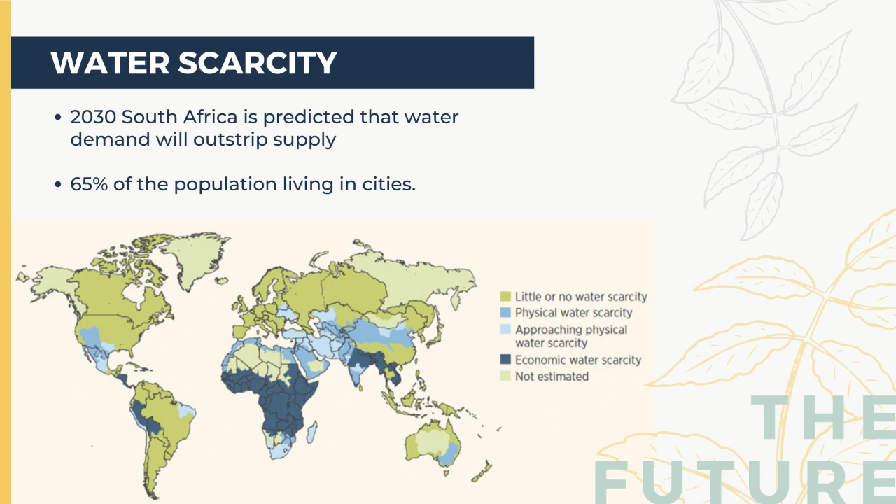As water is a finite element, how do we create this illusion of infinite water the way nature has done for billions of years? While water is the most common element on our planet, less than 3% is fresh water that can sustain human life. As the global demand for water keeps pushing on this limited resource, we need to become more innovative with water usage.

Water is the promise of life and can be linked to all the UN Sustainable Goals, some directly and others indirectly as virtual water. It can even be linked to quality of education, as young girls are able to attend school instead of harvesting water for their communities. At a global level, South Africa's municipal water usage is almost 3 times the global average, and this means we have capacity to improve our water efficiency.

A new emerging engineering division is ecological engineering. While this division is globally recognized as an independent sector, in South Africa it falls within the civil engineering industry. Ecological engineering focuses on systems thinking and creating regenerative design solutions. So how do we go beyond sustainable into the realm of regenerative design by adopting net positive water, mimicking the natural water balance?

In South Africa, it is predicted that water demand will outstrip supply by 2030, with 65% of our population living in cities. But people are saying that we've already allocated all our water resources way back in 2002. So why is nobody talking about this? Because they've been technically gagged from releasing the information. Living in a country crippled by load shedding, what will our future look like when we must ration water as well?

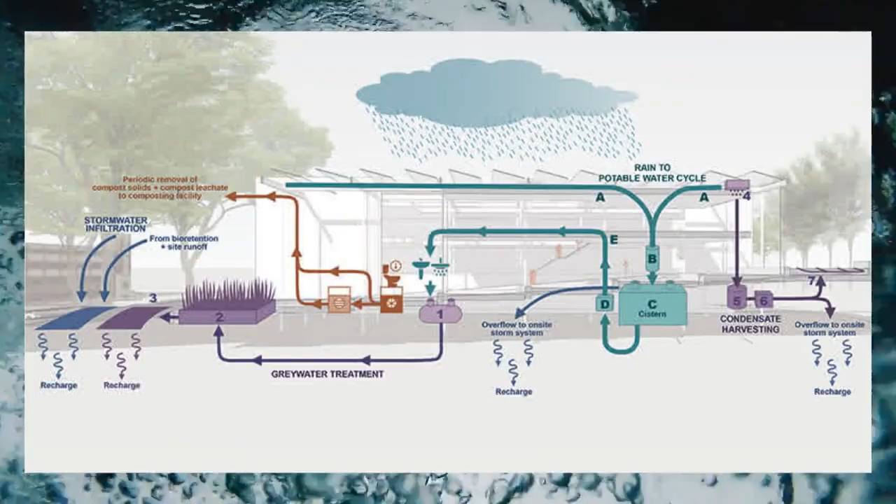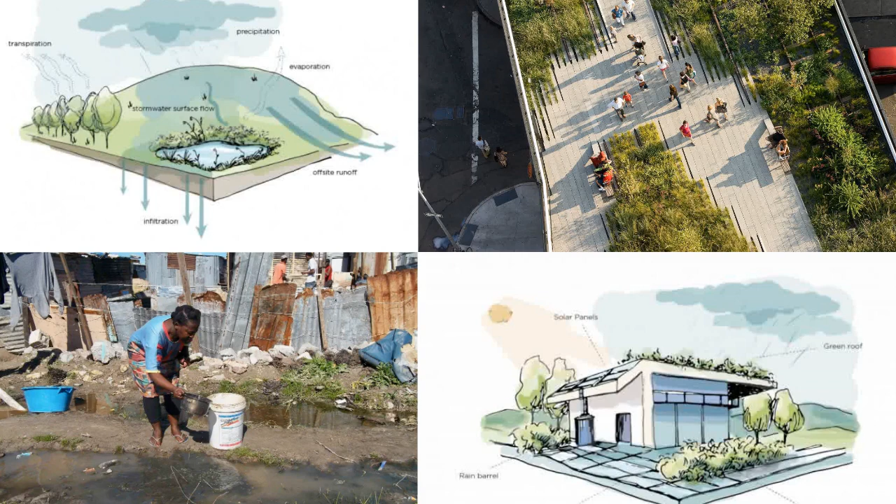So in summary, a net positive water strategy delivers an off-grid, ecologically balanced design that mimics a natural system while addressing water harvesting, wastewater treatment, and stormwater management without disrupting the natural water cycle of the site.

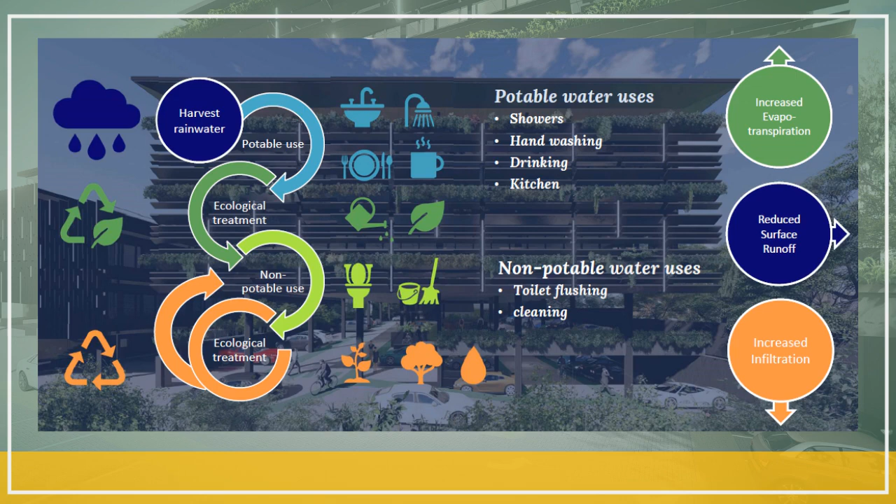How is Living Building net positive water different from other certification processes? The most fundamental difference is that all water demand must be met within the carrying capacity of the site. What that really means is that we need to mimic the natural hydrological conditions without the use of harmful chemicals. All grey water and black water must be retained and managed on site.

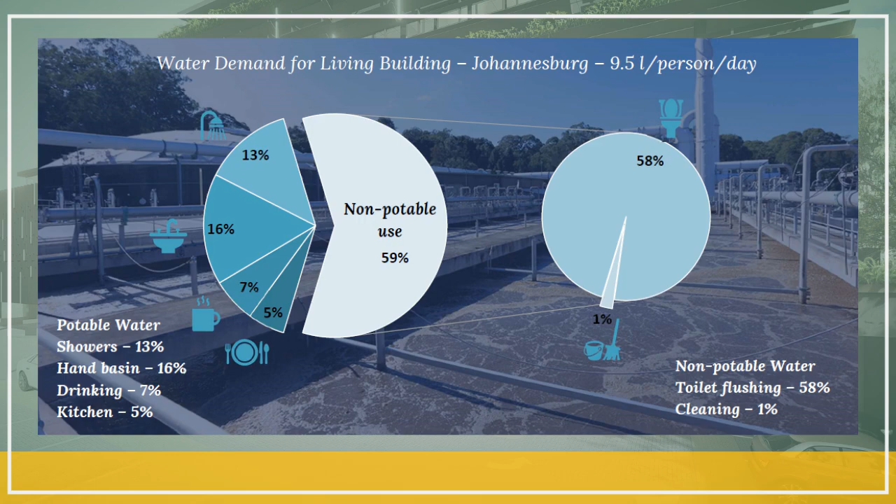With that long list of very specific requirements, it is very clear why so few buildings have met the certification process. In my opinion, it is probably the highest water certification process in the world, and if we do all of the above correctly, we can ensure clean water resources for future generations.

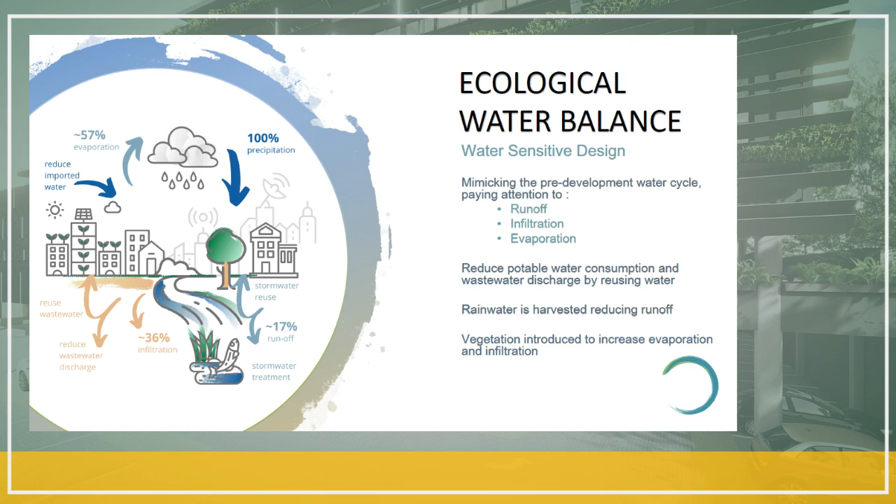So how do we create an ecological water balance? We have to first aim for the targets that have been set by the pre-development conditions, paying attention to runoff, infiltration, and evaporation. Only by rationalizing the water demand as fit for purpose can we create the optimal water balance for a project.

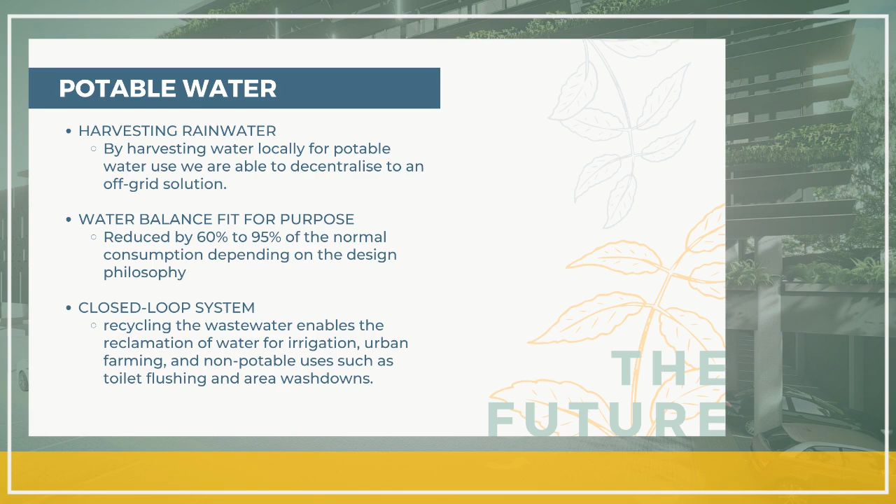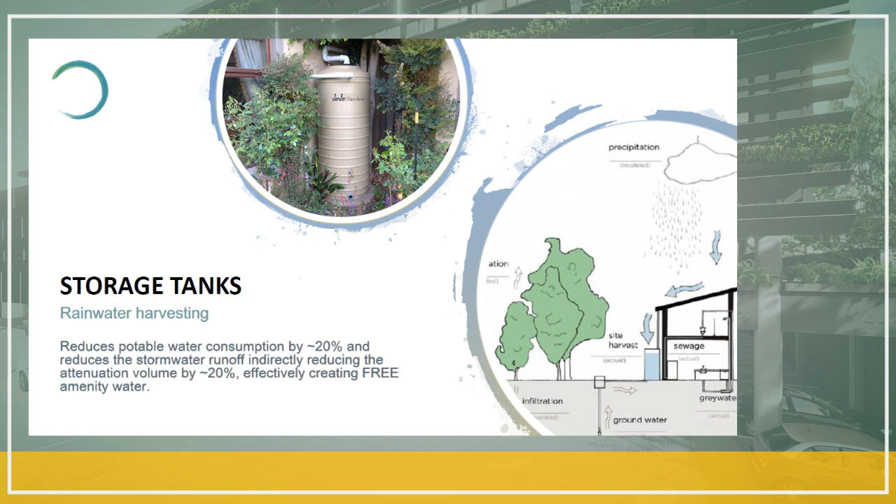Rainwater is one of our purest forms of potable water, requiring the least amount of effort to purify, and is not allowed to be used for toilet flushing in the Living Building Challenge. It should be used exclusively for potable water. It is by harvesting water locally for potable water use that we are able to decentralize to an off-grid solution, which is really the solution that economic water-scarce Africa really needs.

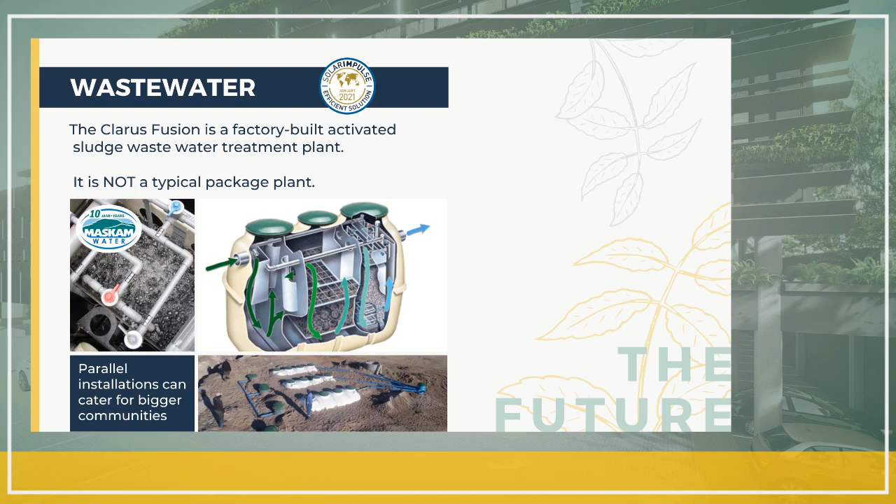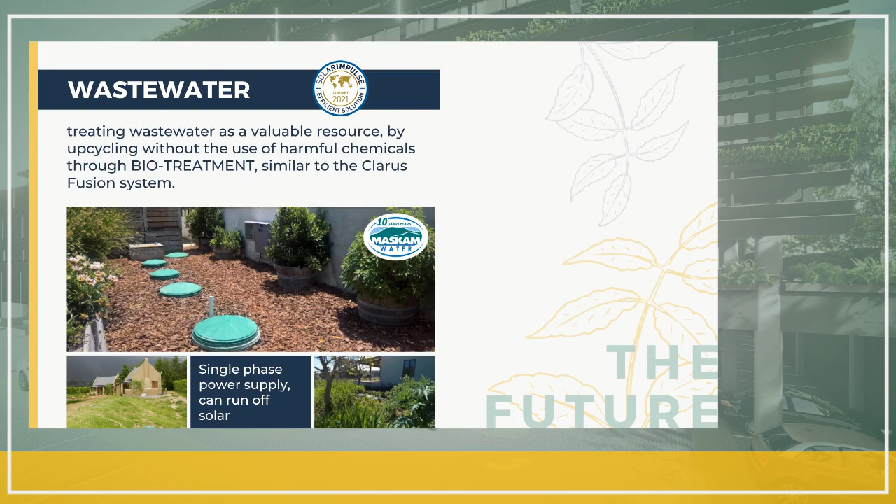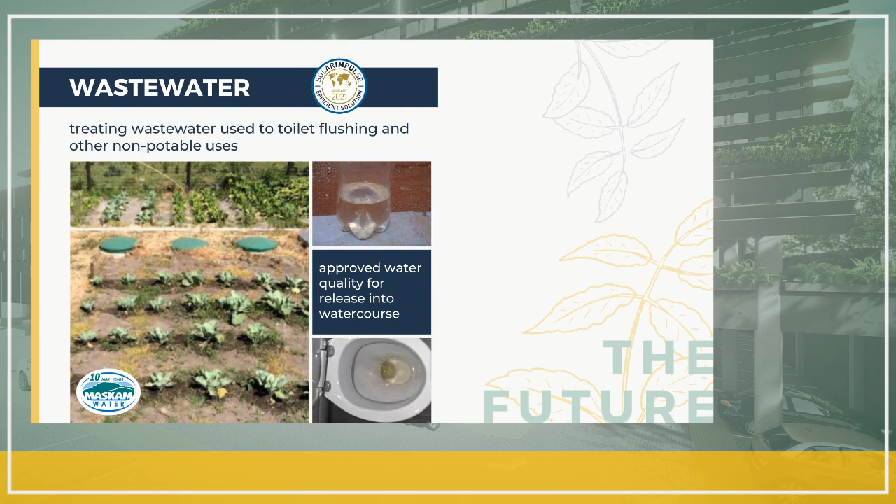When we look at the wastewater system, we need to change our lens here and see the wastewater as a valuable resource. By upcycling this nutrient-rich wastewater, we are able to use the reclaimed water for irrigation and urban farming. We can even use it for the non-potable uses such as toilet flushing and washdown areas. A biotreatment system is really the heartbeat of the wastewater reclamation system, as it mimics the natural purification process without the use of harmful chemicals.

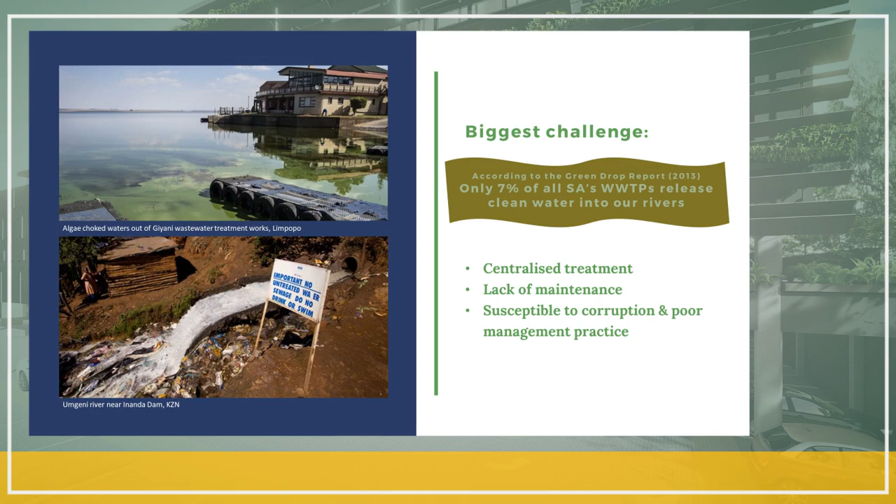One of the main reasons for decentralizing the wastewater treatment systems is that 90% of South Africa's wastewater treatment plants do not operate, fundamentally dumping raw sewage into the downstream user's potable water source, creating the health challenges.

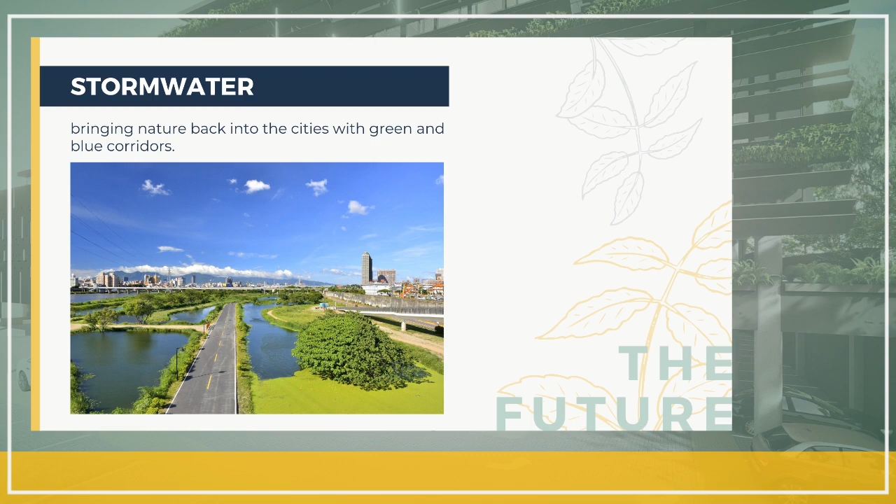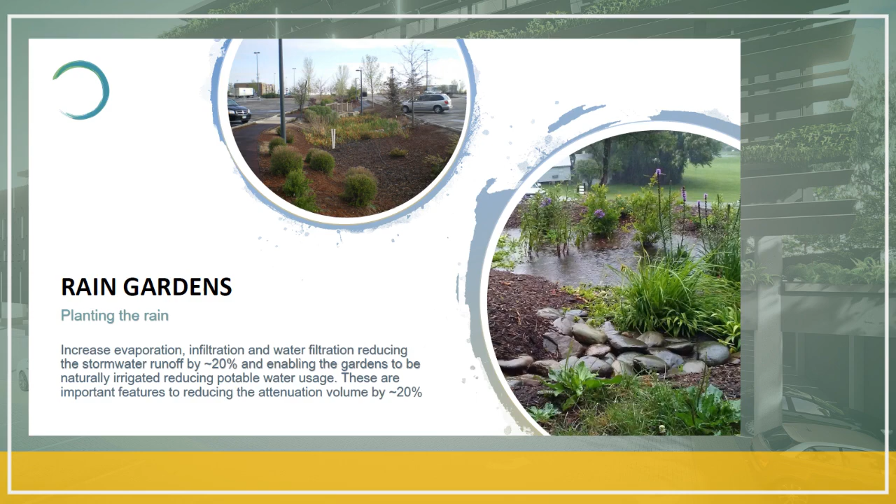When we look at the stormwater management, we have to consider how to reuse the rainfall. How can we increase our infiltration and drive stormwater back into the groundwater through more permeable surfaces in parking areas and rain gardens? And then lastly, we have to incorporate our constructed wetlands into the landscape, where we can use the genius of nature to create the buffer strips that can treat the contaminated surface runoff for oil and other contamination before releasing it back into our watercourses.

There are so many positive benefits to adopting a regenerative design solution. The most notable is the reduced municipal demand by focusing on a hybrid off-grid solution. This will enable many developers to move forward with projects that have been shelved due to the lack of bulk municipal capacity. In a country with aging infrastructure and no budgets, economic water scarcity is already a real risk and challenge. The other real advantage is harnessing the power of nature to do the heavy lifting, indirectly reducing our energy demand and mechanical parts.

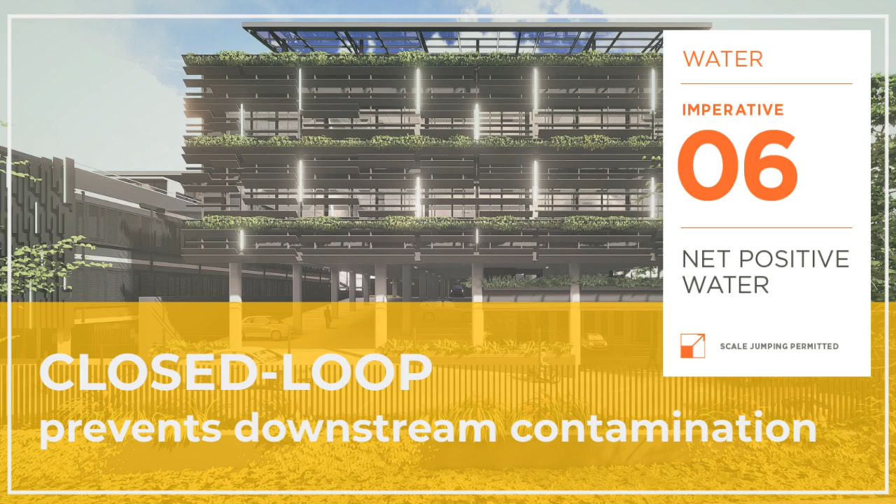Harvesting rainwater is free from micropollutants and pharmaceutical products commonly found in municipal water harvested from surface runoff. And by adopting this closed-loop wastewater reclamation system, we are able to prevent all of the above from entering and contaminating our water sources. The design we implemented also incorporated the option for seamless municipal backup, further increasing the resilience of the system. We are currently refining the business case as more accurate costing emerges as we move forward into the construction phase.

Some of the key assumptions were that net positive water buildings will result in higher rental and occupancy rates. Accredited developments will increase at a higher rate of return than the market average. The municipalities will still require service connection fees. Municipal supply costs will escalate at a constant rate, even though we know water remains undervalued, and that escalation will exceed inflation.

So going forward, what does this mean? We are currently looking at how do we scale this to become a Living Community Challenge. We are working on the business case with Muscombe Water with regard to scaling the Clarus Fusion to be more than just a single dwelling cost, and what are the implications of that? How do we make this more affordable for every South African to be able to have the benefit of a net positive water strategy?

So if there's anybody out there who has a project or a community project, eco-estate that is needing some help or wanting some advice and involvement, we are more than happy to look at it with you. Thank you for your time, and I'm happy to take any questions.